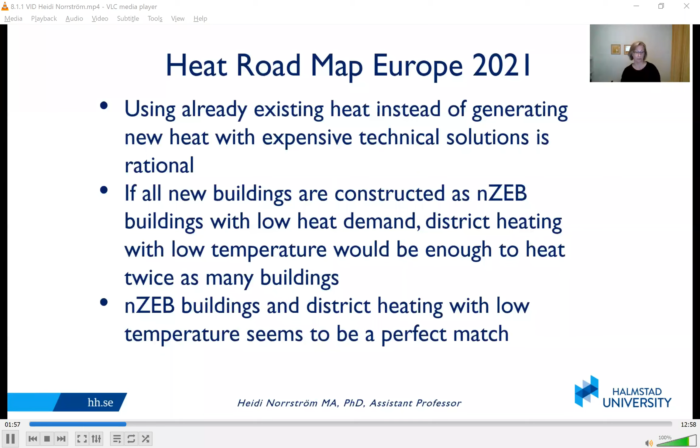So the local company HEM is expanding their district heating system for 550 new flats in Ranagård, which is situated in Halmstad in the south of Sweden. HEM, Halmstad Environmental and Energy, is testing a new fourth generation district heating technology developed at Halmstad University by some colleagues of mine. The university follows the technical work in one part of the project for quality assurance, and our university, together with Malmö University, is also making a study on the acceptance of new technologies.

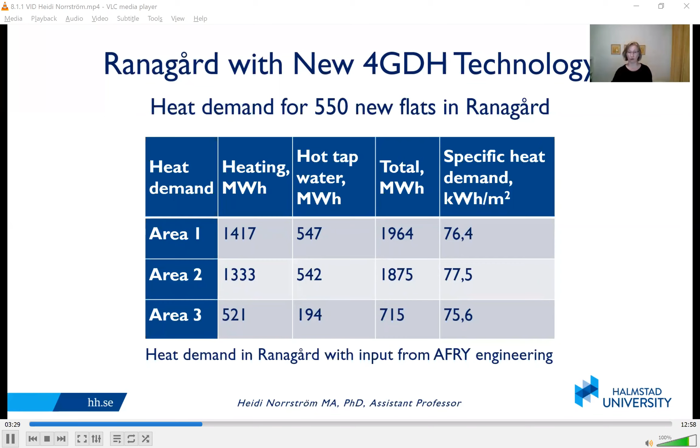So how did we get here? The first generation of district heating was established already in the 1880s, supplying steam in concrete pipes, and the technique is still used in both New York and Paris. The second generation started in Germany in the 1920s, based on supplying hot water instead, but still at 100 degrees Celsius.

It was known as the best technique during the period between 1930 and 1980. The third generation of district heating was invented by engineers, still had high supply temperatures, 80 to 95 degrees Celsius, and hot water, but there were prefabricated and pre-insulated pipes for supply and return. Altogether it made it more efficient, and it was considered the best available technique from the 1980s onward.

Finally, the fourth generation of district heating was tested in Denmark in the 1990s for distributing solar heat. Its main characteristic is significantly lower supply temperatures, below 70 degrees Celsius, resulting in lower heat losses and the possibility to use plastic pipes instead of expensive steel pipes.

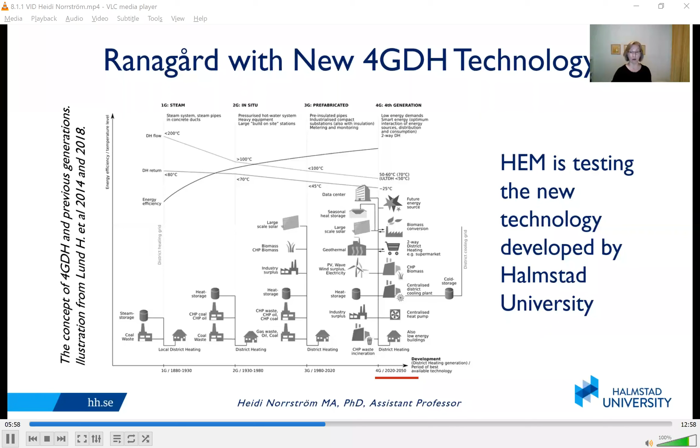Low temperature district heating using two pipes, supply and return, in one casing in the distribution grid has been tested in Germany, Sweden and Denmark, and it's now often considered the best available technique. One alternative fourth generation district heating uses three pipes, where the third is for supplying water circulation without any temperature contamination of the true return temperature, according to Averfalk and Werner.

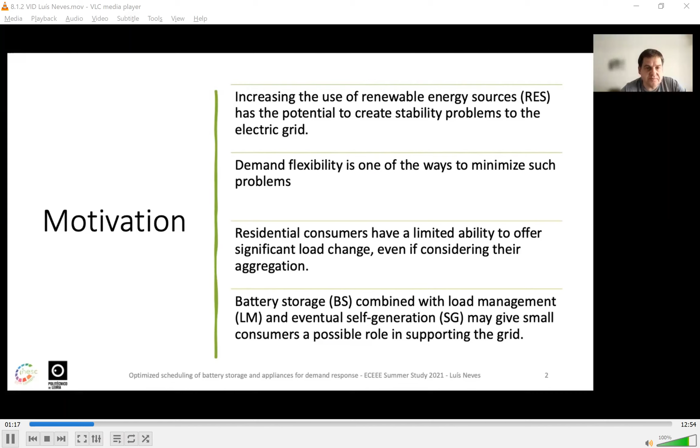So the objective of Luca's work was to implement a control algorithm to decide upon the charging and discharging of the battery and the scheduling of appliances with a minimum discomfort to the user.

The concept of demand response is well known. The objective is to stimulate consumers to adapt their consumption to the needs of grid management in a way that minimizes the need for excessive and expensive idle capacity, so helping to keep the balance between a now variable supply and the naturally variable demand.

We focus on price-based demand response, assuming a real-time price scheme which is supplied to the customer a day ahead.

Many researchers have been working on these concepts, applying different approaches, namely metaheuristics like genetic algorithms, but also stochastic programming and mixed integer linear and mixed integer nonlinear programming.

Our approach was to use mixed integer nonlinear programming, using an index to assess the discomfort to the user alongside the energy cost to be minimized.

The model uses the real-time prices for the day, the expected schedule of appliances, and the PV forecast to decide when to charge and discharge and when to operate the appliances.

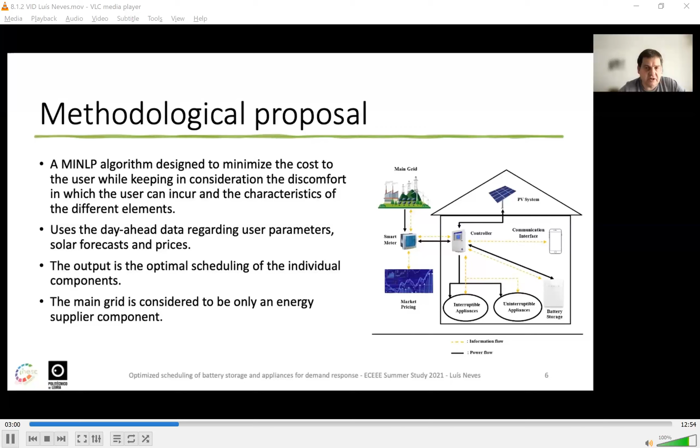Without getting into much detail here, the mixed integer nonlinear programming model considers the inconvenience costs, which are to be minimized, computed based on an index which uses the square of the difference between the intended schedule and the effective schedule of the appliances, multiplied by the energy prices and an acceptance factor, which is used to moderate the importance of the discomfort cost in the analysis.

The other equations are pretty much straightforward, but we include the computation of the photovoltaic generated energy based on the solar radiation, and computation of the state of charge of the battery based on previous conditions, which is limited to avoid the loss of battery life, so the battery degradation.

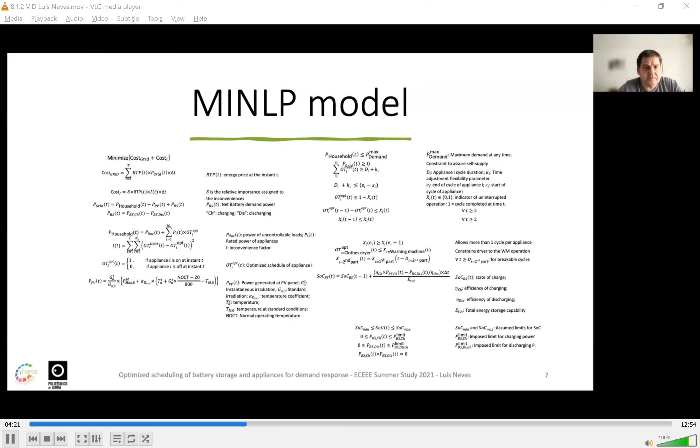The analysis of results was focused on the amount of expected savings according to different scenarios and on the participation of the battery system in the process.

It also focuses on the possible disparity between expected and real savings, namely due to the differences between the forecast and the actual PV generation, which is estimated based on the difference between two consecutive days of the radiation forecast, as well as the sensitivity of results to the variation of different factors, namely the accepted inconvenience.

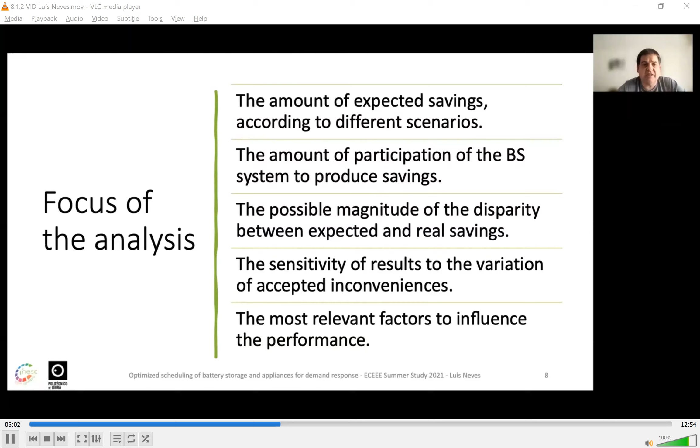The case study was defined with data sets for different parameters, namely the PV generation data obtained from the photovoltaic geographical information system of the JRC, the wholesale market prices of the Iberian market operator, the renewable generation data from the Portuguese system operator, and appliance load profiles and load demands, mostly from public databases.

The load management was simplified, assuming only two types of shiftable loads: those which can be interrupted, although assuming that the cycle of operation has to be completed, and those which can be shifted but not interrupted.

Two data sets of real-time prices were created to reflect what could be a residential real-time price scheme in Portugal. One assumed the current generation mix by rescaling the wholesale market prices, and the other tried to reflect a renewable-only scenario using the inverse of the current renewable energy generation in the Portuguese system to represent the possible fluctuations of such prices, also scaled to the current average price for residential customers according to Eurostat.

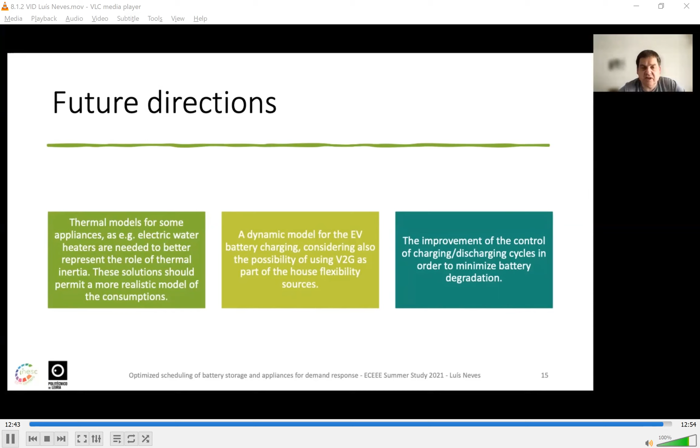Thank you for your attention.

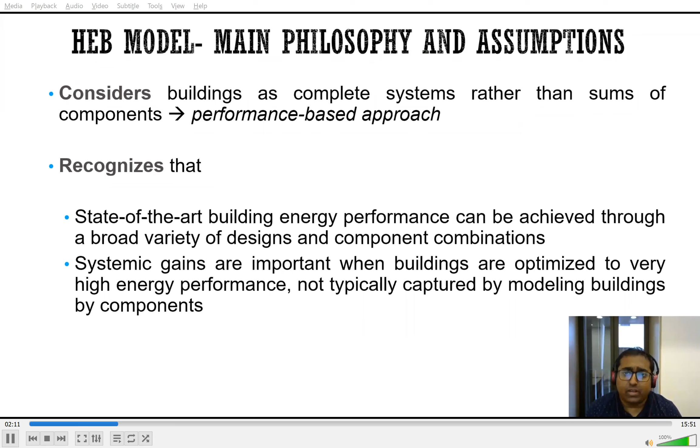So as I mentioned, we have different scenarios in the HEB model to calculate the total energy demand. Precisely, we have 4 scenarios defined. First is the nearly net zero scenario. In this scenario, what we are trying to understand is the potential of deploying net zero energy buildings. Net zero energy buildings means buildings that can produce as much energy locally through the utilization of renewables, here building-integrated renewable energy production, as they consume on an annual basis.

The second scenario we have is called the deep efficiency scenario, which demonstrates the potential of state-of-the-art construction and retrofit technologies that can reduce energy consumption by a significant proportion. Third, we have the moderate efficiency scenario, which incorporates present policy initiatives. For example, in the EU, we incorporate the EPBD guidelines and codes, and for other regions, it's the new building construction codes and policies which are taken into consideration.

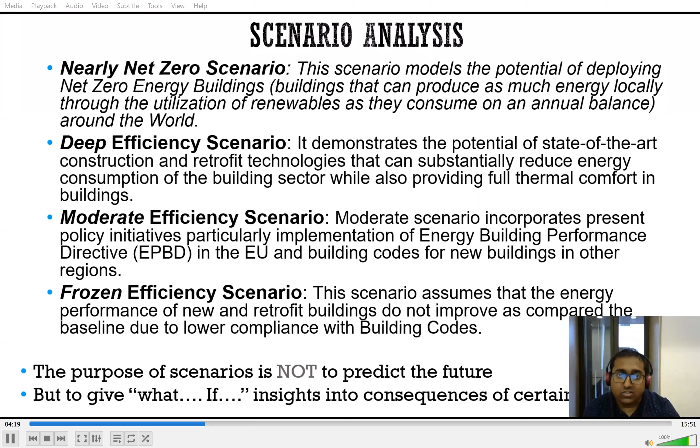The fourth and last scenario we have is the frozen efficiency scenario. This scenario assumes the energy performance of new and retrofit buildings does not improve as much as in the other scenarios because of lower compliance with the building codes. And therefore, we would like to see in such a case what would be the future energy consumption of the building sector. However, I must reiterate that the purpose of these four scenarios is not to predict the future, but rather to give an insight into the what-if consequences of certain policies.

Now, with these four different scenarios, we have different layers of classification within the HEB model. In terms of geographical coverage, we have 41 regions in total, which actually cover the whole world. Second, within these regions, we have 17 different climatic regions. Third, in terms of location, whether the building is located in an urban or rural area, we have that classification as well. The fourth classification is about building categories: whether it is residential or commercial and public. And the third category of building we have is called slum, or in literature it is often referred to as informal settlement.

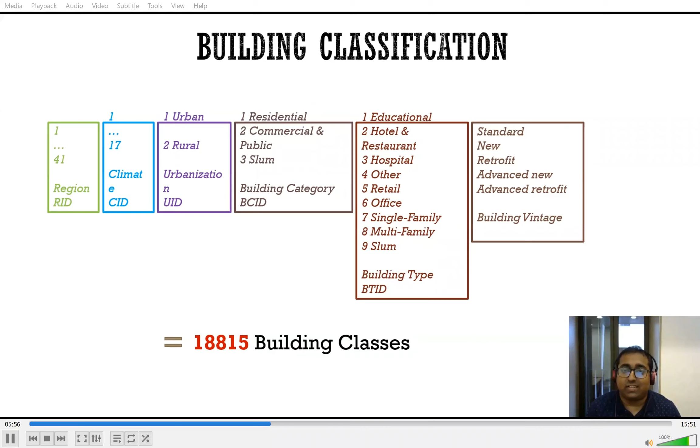Within these building categories, there are also different types of buildings, such as educational, hotel and restaurant, hospitals, other, retail, and offices. These are the 6 categories which belong to commercial and public buildings. Whereas residential buildings are further disaggregated into 2 categories, single family and multifamily, and slum is itself a category. And among these different building categories, as per their energy performances, we have classified these buildings into 5 distinct building vintage types: standard or existing buildings, new buildings, retrofitted buildings, advanced new buildings, and advanced retrofitted buildings. These advanced new and advanced retrofitted buildings are the state-of-the-art performance buildings.

So these are basically our geographical coverage of the HEB model. Now, in terms of climate coverage, as I mentioned, we have 17 climate regions or climate zones. These climate zones are defined based on 4 variables: heating degree days, cooling degree days, relative humidity, and average temperature of the warmest month. Based on these 4 variables, we have classified 17 climate zones for each of the regions.

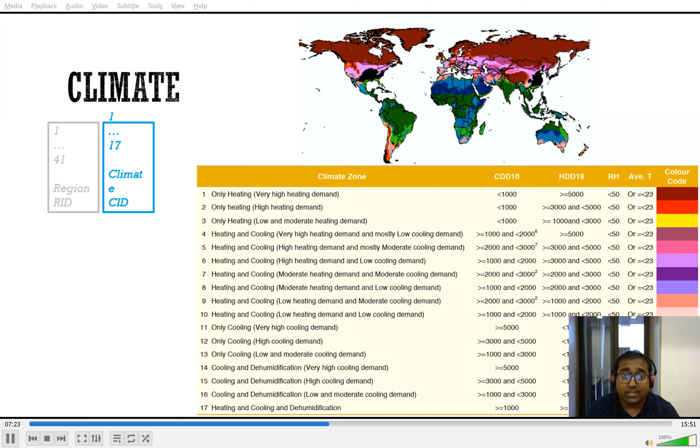Now, what I should definitely mention here is that we are reclassifying these 17 regions as per some new available data. So this classification may change in future. Just a small anecdote.

So with these different levels of classification, coverages, and building vintages, the HEB model produces basically 2 key outputs. First is the floor area, second is total energy consumption, and we also produce total CO2 emission. Although we can calculate CO2 emission, we are still updating this CO2 module at this moment. But for floor area and total energy consumption, we do calculate for each of the regions, and at a very aggregate level.

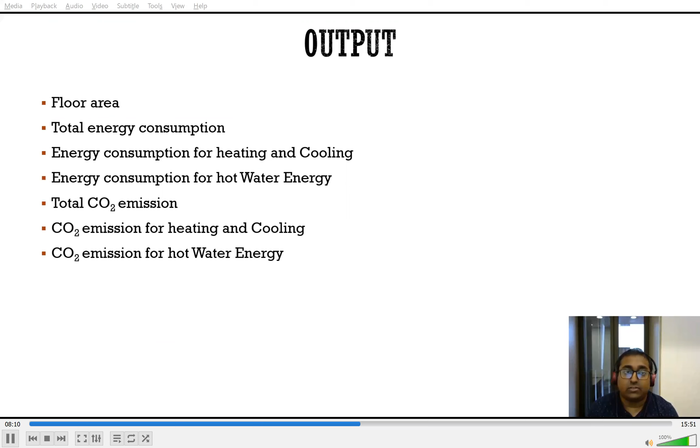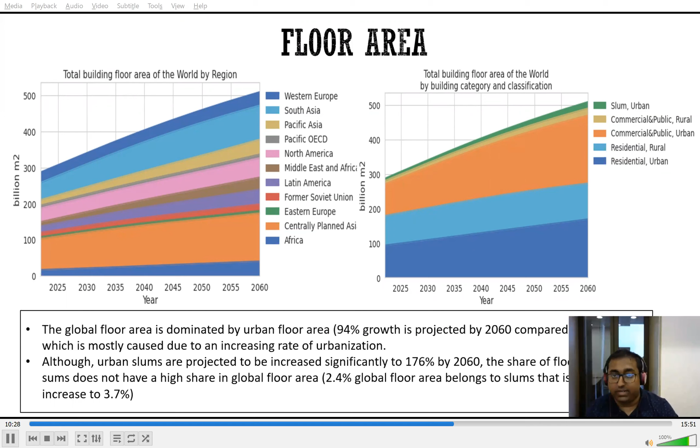There is another component attached to it, that is the slum area growth, or in other words, the floor area growth in the slum population or slum areas. There we can see a significant growth in the slum area. But when we calculate the total energy demand, it contributes very marginally. So although there is an immense increase in floor area in the slums, the total impact of it is negligible in terms of energy demand.

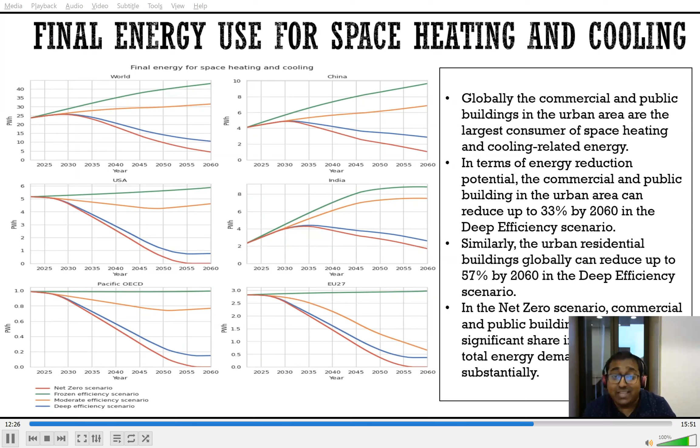Globally, commercial and public buildings in urban areas are the largest consumers of space heating and cooling. And they can actually reduce 33% of total final energy for space heating and cooling by 2060 under the deep efficiency scenario. This is the world figure I'm telling you. The residential sector, on the other hand, can reduce up to 57% of its energy under the deep efficiency scenario by 2060. So you can understand that energy demand reduction can be significant under the deep efficiency scenario.

Now moving on to the next parameter, that is hot water energy consumption. Similar to space heating and cooling, hot water related energy demand is also presented for the same 6 regions.

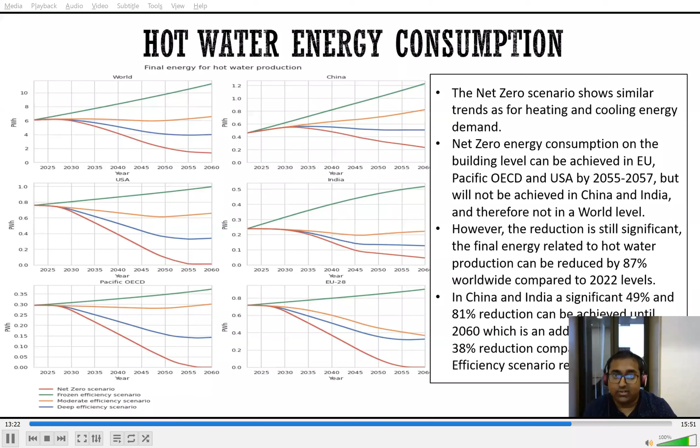And here also you can see that the developed regions can actually achieve the net zero status, whereas India, China, and henceforth the world cannot achieve the net zero status by 2060. However, as I mentioned repeatedly in the last slide, although these regions are not able to achieve the net zero status, they are reducing a significant amount of energy demand due to water heating related energy consumption. So this is really crucial to understand their potentiality.

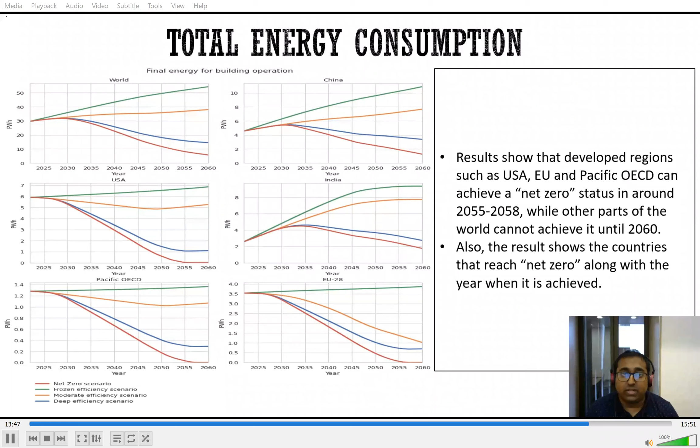And let us just see then what will happen in the total energy consumption case. Total energy consumption is basically the summation of space heating and cooling and water heating. And here also you can see similar trends, where developed nations are reaching net zero status by 2060, whereas countries like India, China, and henceforth the world are not able to achieve climate neutrality by 2060.

But if they chose to continue with the existing policies in the future as well, then you can see that in both of the regions, the energy demand would go up significantly in the future. And that is why it is really important for us to understand that, no matter what, we should go for a high efficiency standard.

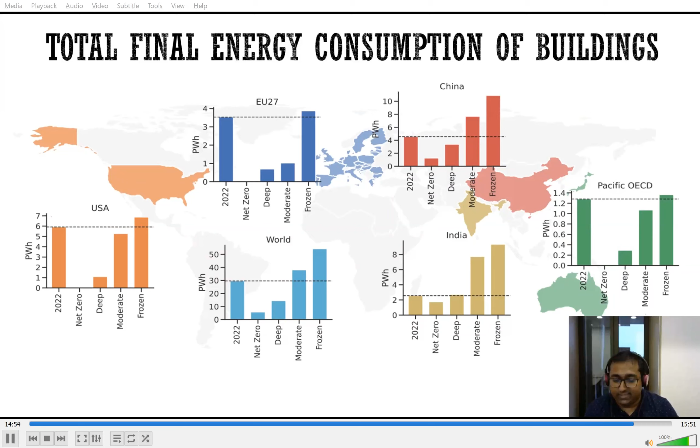And let me break it down: for the developed nations particularly, it would be important to renovate the historical buildings, advanced retrofit the historical buildings, and for developing regions, it is really important for the new building stocks to adhere to a stringent building code that requires a high level of energy performance for the new construction.